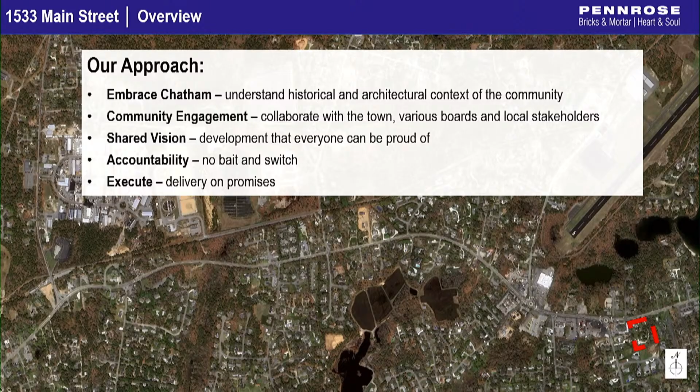Our specific approach on this project, post-RFP, was to listen to the community and stakeholders to further refine a plan that will be well received by the town of Chatham. Since being designated developer, we've engaged with multiple town departments, town staff, and different associations and boards to try to refine something the town of Chatham will be proud of. One thing we pride ourselves on is that we're very transparent, there's no bait and switch; the plans we're presenting tonight are what we fully intend to build. This slide shows an example of the stakeholder engagement we've undertaken, representing our collaborative approach, which we intend on maintaining going forward. This isn't the end of our engagement with stakeholders.

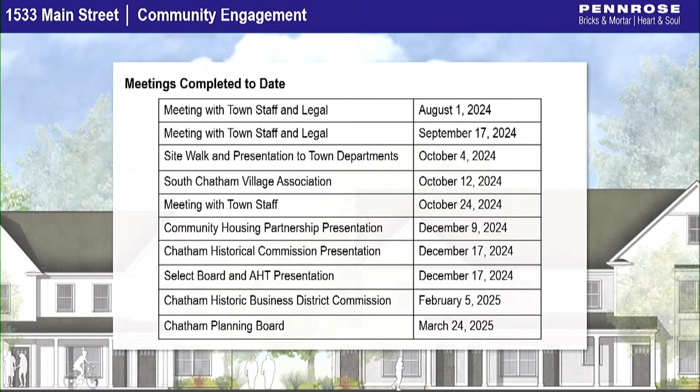Okay, at this point, I'd like to introduce Paul Atman from Union Studio, the architect, to present the design of the buildings.

Thank you, Rio. Hi, everyone. I'm Paul Atman. I'm a principal at Union Studio Architecture and Community Design. We've been in practice since 2000 with two offices. Primarily, our home office is in Providence, and we have a small 5-person firm in Philadelphia. We are a mission-oriented firm, and our mission is to use the power of design to enrich lives and improve communities wherever we work and live, bringing integrity and community with our clients to the projects they envision.

We have extensive experience here on Cape Cod, where we have a lot of projects, both small and large in this scale. We've done a lot of advocacy group work and research with the Cape Cod Commission to outline better strategies for Cape Cod's housing crisis, looking at where and how to develop smartly and with appropriate density for the communities on Cape Cod.

These are a couple examples of projects we've done and are realized. On the left is Park Holm in Newport. This design is a basis of what we're proposing tonight. It's a 2.5-story volume on the front end with a short tail of 2 stories off the back. The Park Holm image here is much longer than what we're proposing. Our proposal is actually truncating the building right about this line, so it's not as long.

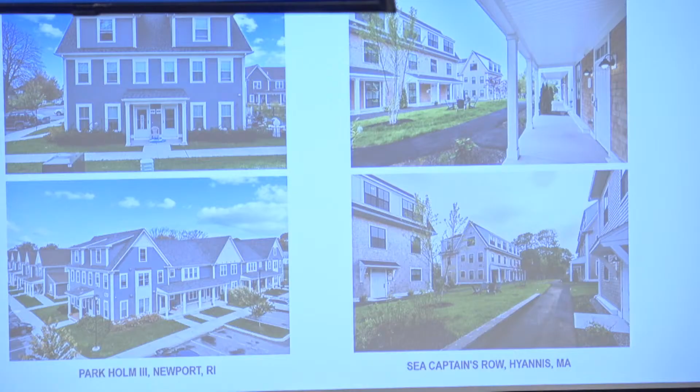A little closer to home is Sea Captain's Row in Hyannis, which is workforce housing—small scale, multiple buildings on a site near the ferry terminal, 2.5 stories with 1 to 2 bedroom units.

As Rio mentioned, we've been working with the town and meeting with stakeholders since August, and we've incorporated a lot of the feedback we've gotten along the way. We've added additional parking along the roadway, since there was concern there wasn't enough in our original proposal. We've located accessible parking spots appropriate to the accessible units—there's 14 of them in the neighborhood—along with a community building.

We've repositioned the 2.5-story buildings further away from adjacent residences. We've strategically taken the 2-story smaller townhouse buildings and put them along the property lines closer to the residences on the back, south, and west sides.

We've decreased the overall length of the community building that was fronting Main Street, since there was concern that facade was too long and was blocking views into the neighborhood. We've also increased the road width to accommodate vehicle access, primarily emergency vehicle access, from 22 feet to 24 feet.

We've identified all the existing trees mature enough to be saved and incorporated them into our design—Mark will talk more about that later. We've identified potential roof locations for solar panels throughout the neighborhood, and we've incorporated different siding materials, details, and window patterns on buildings to bring more variety where the same building might be used a couple times throughout the neighborhood.

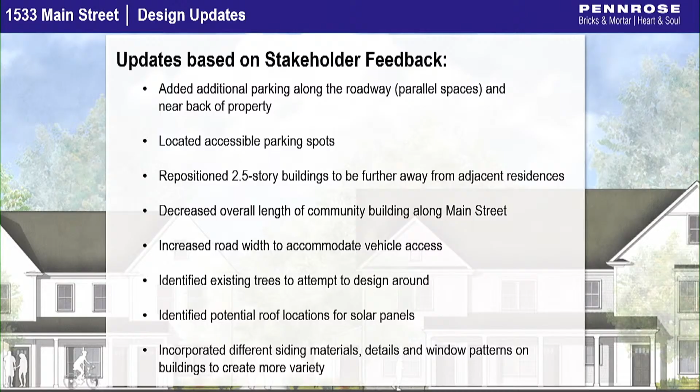We've looked at how we can differentiate the buildings to bring a little variety. I should point out we are not looking at color yet. We did get a lot of comments that white on white is not appropriate, so we understand that, but we didn't want to start the 'color by committee' exercise too soon.

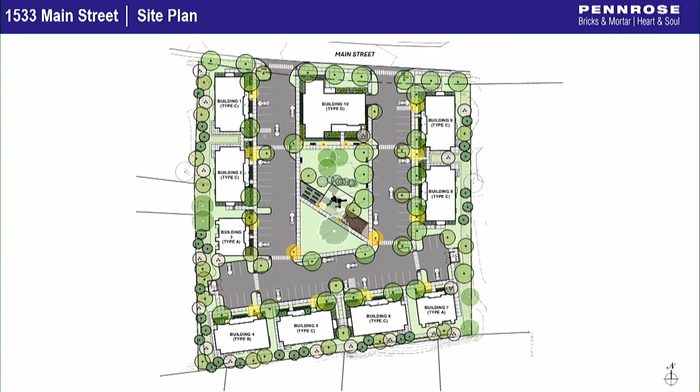I'd like to walk you through the proposed site plan. On the plan, north is Main Street, and we're proposing a very simple vehicular circulation in and out of the site, with ingress and egress at two curb cuts, two-way traffic around, organized around a common green where Mark will talk more about it, with a playground, passive recreation space, and existing trees being saved. The turnaround here is for emergency vehicle access, allowing a hammerhead turnaround so they can easily egress the site when they come in.

All of the buildings have multiple front doors, and each unit has its own front door to the exterior, which allows us to really activate the street and the network of sidewalks throughout the site. For instance, there are 2 front doors here facing Main Street, and the other 4 apartments have their own door along a common porch facing the sidewalk. We've been very careful to position those front doors to give a front for each building, and in some cases 2 fronts—one for Main Street, and one for the internal roadway of the neighborhood.

Mark will talk about the landscaping, and Joe will talk about the civil engineering a little bit more.

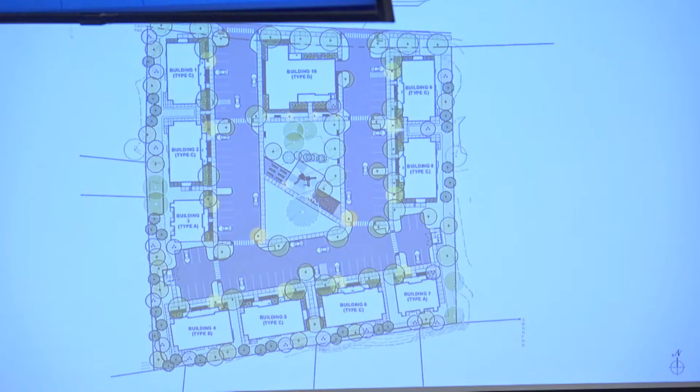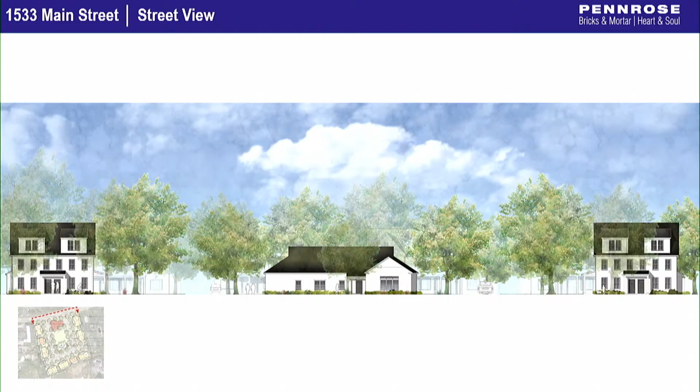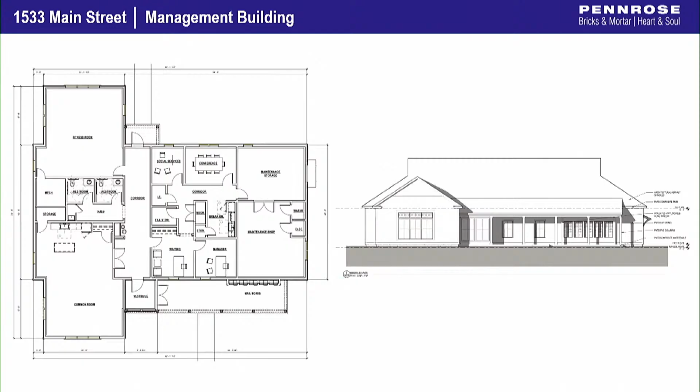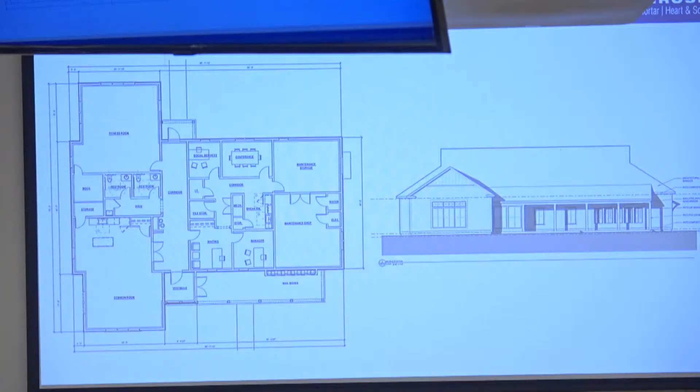The management building is what Pennrose proposes on developments of this size, and if there's questions about that, Rio can talk about it, but it's very simple. There's a common room here for the residents to use, a small fitness room, and they share bathrooms. The majority of it, about half, is management office, as well as a maintenance shop and maintenance storage. Pennrose manages all their properties, and if there's any questions regarding that, Rio could talk about that.

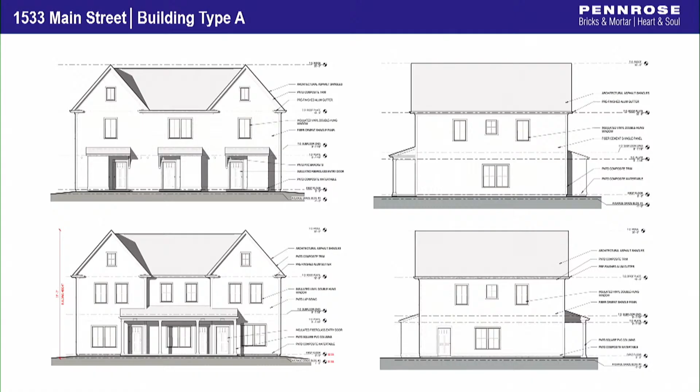This here is the smaller building type, the 3-unit townhouse. We are asking for a waiver in terms of building height. We know that the limit is 30 feet, and we're proposing building heights from 30 to 34.9. So we're just a little over, but they're 2-story buildings as the code, the ordinance anticipates, and also 2.5 at the very highest level. These are the 2-story buildings.

This here is a 6-unit with 2 units on the ground floor and 4 small 1-bedrooms on the second floor. This here is the larger one - it's still 6 units, but it's 2.5 stories on one end of the building, and 2 stories on, let's say, the tail end.

The proposed materials are asphalt shingle roofs, vinyl windows that are super insulated for energy efficiency and Energy Star certification. There's lap siding on the front part of this building and then shingle on the back side. We've arranged and proposed different window fenestrations, so in some places where there's a double window, that same building down the road might be split to a pair separated. There's little nuanced differences that we're working into the design.

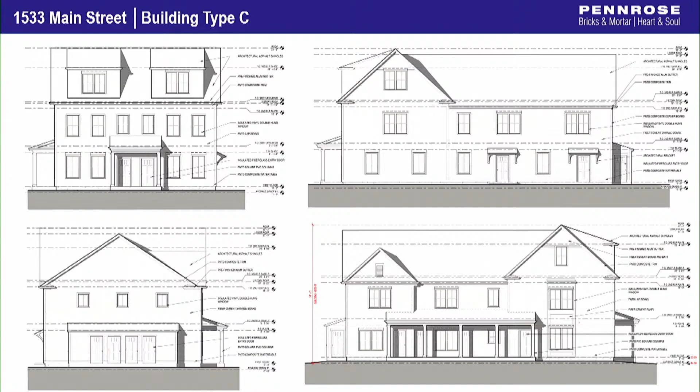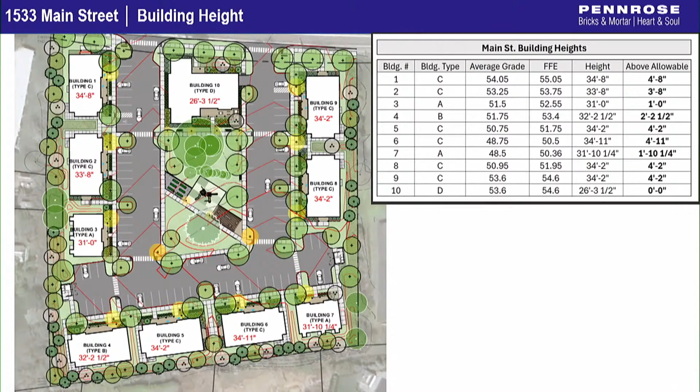I'd like to turn it over to Mark from Crowley Cottrell next. Thank you, Paul.

So looking back at the site plan, we have provided sidewalks around the entire community so that it's walkable, as well as some locations for bike storage and lush planting for the streetscape. There are street trees proposed along the internal street as well as Main Street.

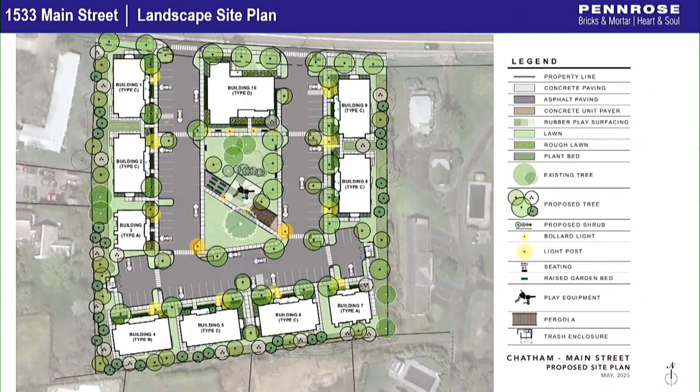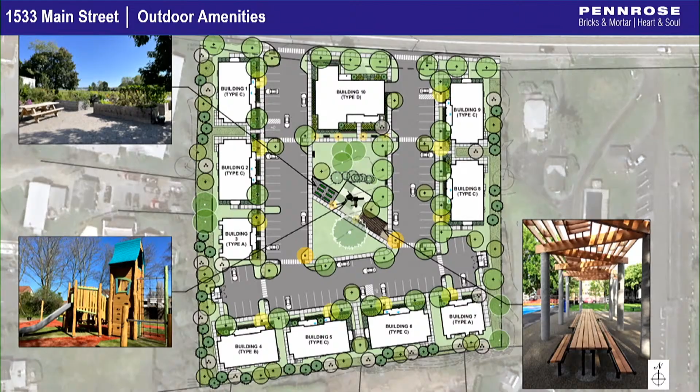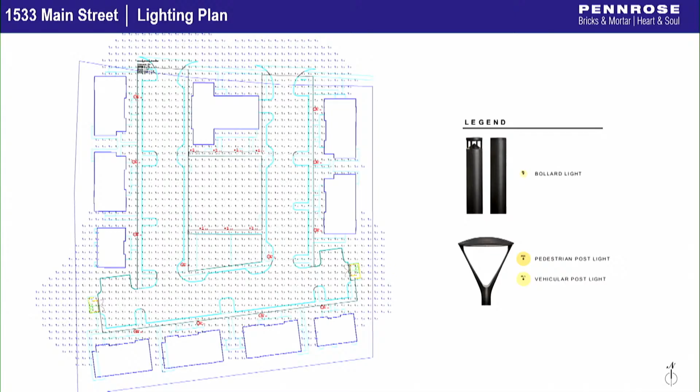This plan here, which looks like just a lot of numbers, is a technical plan that's calculating the amount of light that's being produced by these fixtures. The important thing to note is that we are at the lot lines, we're at 0. So we're not throwing any light over to abutting properties and keeping the light where it's needed in the areas where people will be traversing.

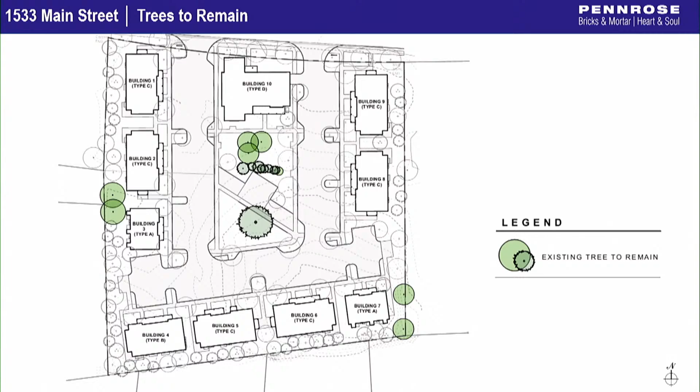We've worked really hard to preserve as many mature trees as possible. There are a few on the periphery to the west and in the southeast corner, and the majority are in this community green area. We've been able to preserve a statement evergreen tree as well as some big maples, and a remnant hedgerow that we'll keep and prune for sightlines. This goes a long way in helping the community feel these trees fit in and are beautiful, and they'd be really hard to install at this size, so we're glad to keep these.

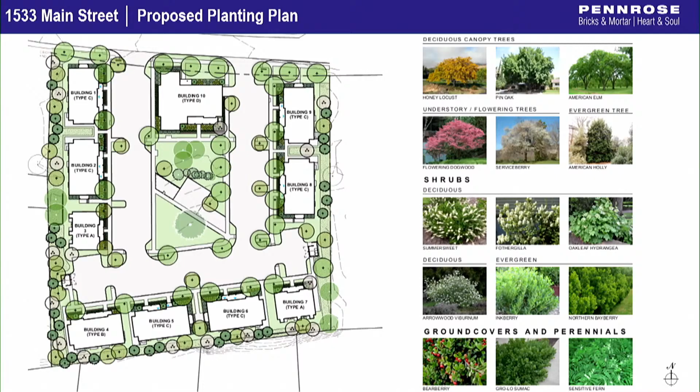This shows our planting strategy. As mentioned before, there are street trees along all the roadways, but we're also proposing a substantial buffer planting on the edges of the property, as well as lush streetscape planting of shrubs and perennials. These pictures are just some examples of what that could be. We're going to keep everything suited to the Cape and for interest throughout the year.

I'll hand it over to Joe.

Hello, good afternoon. Joe Henderson with Horsley Witten Group. We're an environmental consultant firm out of Sandwich, and I'm going to walk through some of the site grading and utility components of this project. Here you'll see this is the site plan. Paul touched on it earlier a little bit.

There are two entrances off of Main Street. As part of our due diligence for the project, we coordinate with the fire department, so we've run a program showing that a ladder truck can circulate the site, and that's been completed. As for dimensional requirements, Andrew will touch on some of the waivers a little later, but we do meet the side and rear setback requirements. However, for the front, we do ask for a waiver.

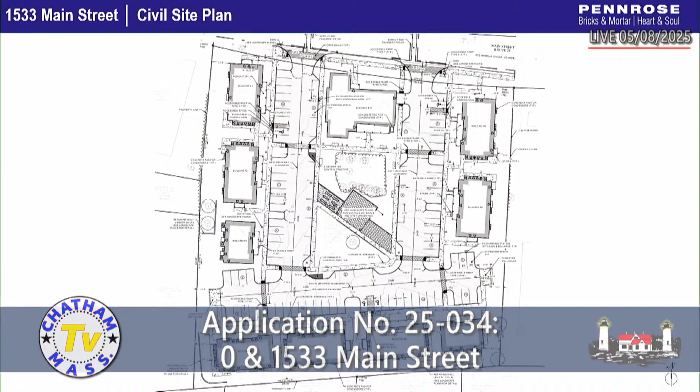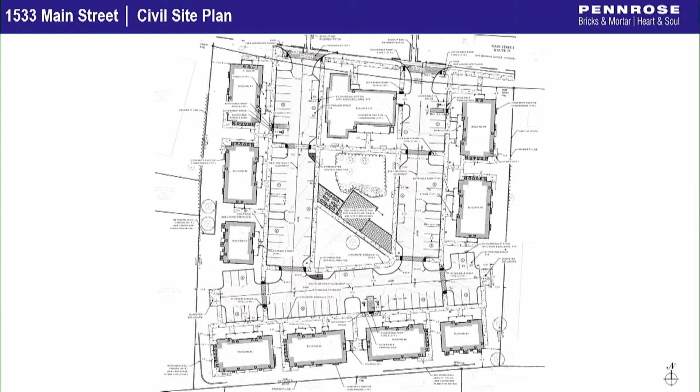All the parking is either 90-degree or parallel. The 90-degree spaces are 9 by 18 feet, and the parallel spots are 8 by 22 feet. Road widths are all 24 foot or wider, as Paul mentioned earlier. We are locating two dumpsters on the site, one on the east and one on the western portion.

I'm going to switch now to the grading. As for our approach, the site does slope from Main Street to the south, so we've done our best to match that as much as possible with our proposed grading. We use a GSI or LID type method for our stormwater management, incorporating tree trenches where we treat the water quality volume, typically about 1 inch of rainfall. Larger storm events will go into underground chamber systems located throughout the site. We are proposing to meet the stormwater management policy, and we've submitted as part of the application our stormwater management approach outlining all the calculations and everything that goes along with that.

As for site utilities, there is sewer available in the street, with 3 sewer stubs along Main Street, one of which is for the existing home. We're proposing a combination of gravity and a pump station: a portion of the site will flow by gravity out to the street, and another portion in the lower area will require a lift station that pumps to the gravity system and out to the street. The lift station would have redundancy in its pumps, and there would also be backup power available in case of emergencies.

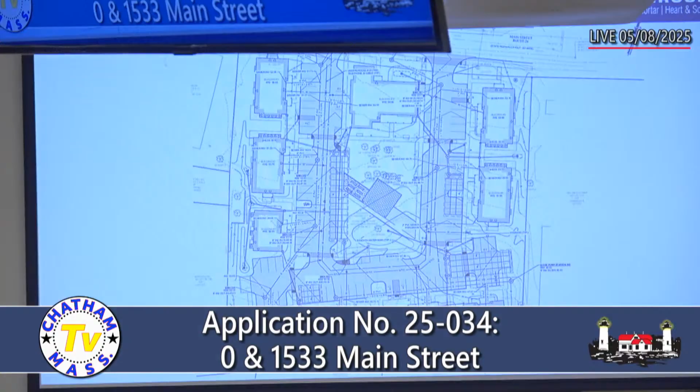The slope along the back rises slightly to the abutters, and on the west side we are slightly lower, while we match grades around the east side predominantly. That's all I was going to touch on, and I'll turn it over now to Andrew.

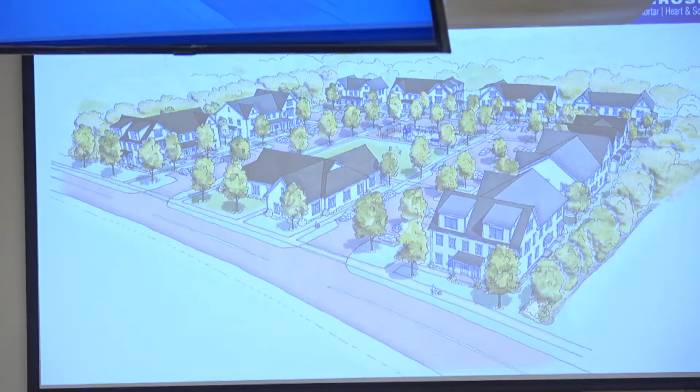Good afternoon. For the record, my name is Andrew Singer, attorney assisting the project. I had submitted a legal memo to the board, and I won't go through all of it because what we hope to do today is, after our presentation, give time for initial comments and questions from the board and the public before we're continued, since we're introducing things today. There'll be a lot of questions and details we may not hit today, but we're happy to provide answers or discuss them whenever.

And we have your memorandum, thank you.

So this, as the chair had mentioned at the beginning, is a project under Chapter 40B, Sections 20 through 23. So it's different from a 40A project, which is what you usually look at. This comprehensive permit will be providing affordable housing.

In this case, 25% of the apartments, 12 of them, are going to be deed restricted at 80% of the area median income, which is what's required for a comprehensive permit. However, in addition, in the land disposition agreement that the applicant has entered with the town, they have agreed to ultimately enter into an additional affordable housing restriction with the Executive Office of Housing and Livable Communities.

That would restrict 32 of the 48 apartments at 60% of area median income and 16 of them at 110% of area median income. So anything over 80% restriction is considered workforce housing, and anything under 80% is considered low and moderate income, deed restricted. It's all deed restricted, but at a lower affordability level. The 60% AMI level will provide an even deeper level of affordability, and it all gets into what incomes a family, whether an individual or family with or without children, can earn to qualify for these units.

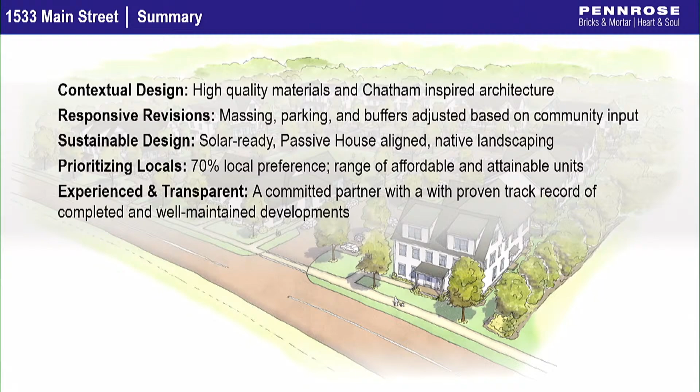And lastly, Pennrose has a strong track record of delivering these types of developments. We invite you to see some of our other projects in the area. We're proud of the projects we've built here, and we think there's a through line through all the projects we've done in New England of being high quality and well-maintained. That's it. Thank you, Chair.

Yeah, thank you so much. So I will announce that we have asked all required commissions and boards to provide us with comment, and we don't have them quite yet, and we didn't expect to. We'd like to have those by the June 5th meeting, and that would require them being filed by June 1st. We'll read those at that point in time, whatever we receive.

Okay, so the next thing we're going to do is take comments from those who are in the audience, and you can go to the microphone in the middle versus up there. And you gentlemen can sit down because this is not going to be a back and forth. So people can either go to the podium for up to 3 minutes and the clock will be on, or you can go to the middle. Who's raising their hand? I see that gentleman right there first, and then we'll go to Attorney Riley after that.

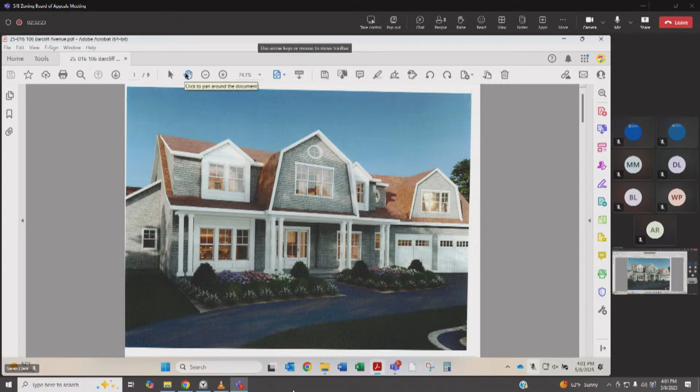What a handsome building. So what we've done since we were last here - there was concerns with the size of the building, even though we have 42,000 square feet. But the applicant, Jill Boudreau, who's here today, also worked hard with her designer, and they've reduced the gross floor area by 1,200 square feet. We've reduced the building coverage from 8.7% to 8.4%.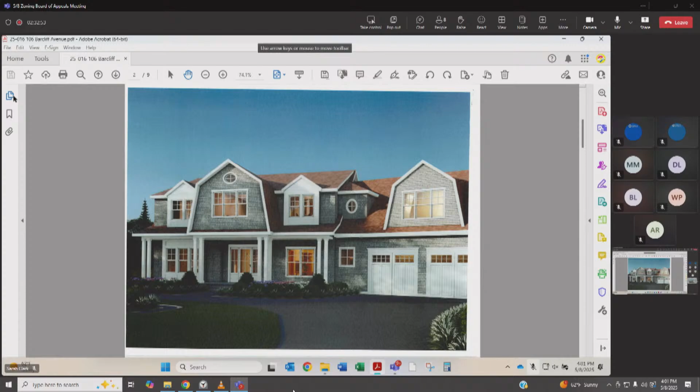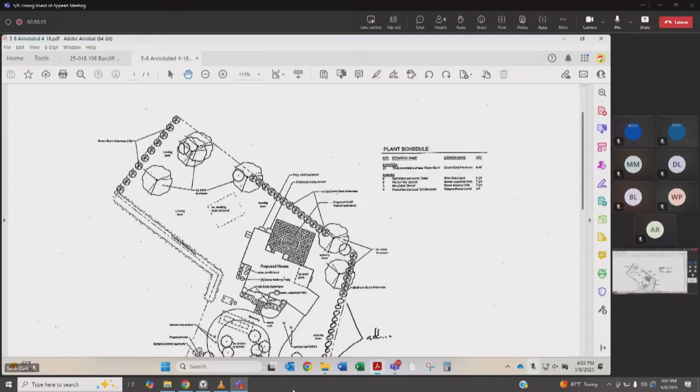We've increased the sideline setback on the west side, 25 feet to 29 feet. We've had conversations with our neighbor to the east, who was represented by Mr. Litchfield, and we've reached an agreement where we've agreed that we'll plant a total of 16 arborvitae. That's the sketch plan that Bill sent over. So we're proposing 6 arborvitae along the property line. They've asked for a total of 16, and we've agreed to that, and we're happy to have it be a condition of the approval if you think that's appropriate.

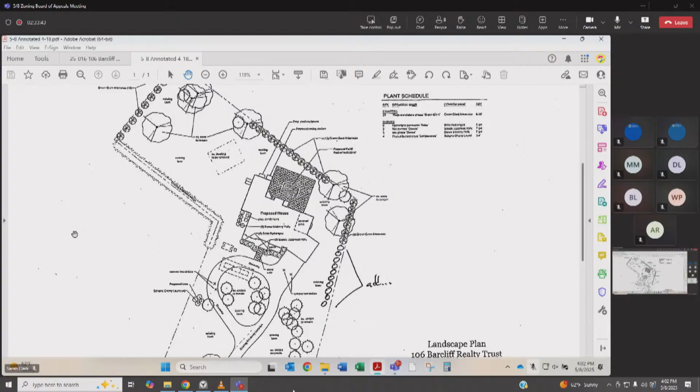I know that Bill has submitted a statement that with this condition, his client has no objection to the proposal. I'll be happy to run through the criteria briefly. We don't need you to, but thank you, because you submitted written copies, and we're good.

At this point, is there anybody here or on Microsoft Teams that wishes to speak in favor of this application? If so, please make it known. Attorney Litchfield is on Teams. Welcome. Thank you, Madam Chairman.

I've never appeared before you in this matter, but I had a couple of other things to do today, unfortunately, and I recognize you've had a long day. But as Mr. Riley said, the applicant has been very helpful and cooperative and has agreed to plant and maintain those trees. So if the board will include a condition that the 16 arborvitae be planted and maintained along the boundary line approximately as shown on that plan, my clients have no objection, and we thank you.

Thank you. Anybody else wish to speak in favor? Seeing none, I'll read the correspondences.

We have a note from Judith Giorgio from 5/6/2025. She reviewed the plan for the property. It's large enough to support a 4-bedroom dwelling in accordance with the Board of Health nitrogen loading regulation. The attic storage space will not be allowed to be finished because it has sufficient privacy to be considered a bedroom. A 5th bedroom would require the installation of an IA nitrogen-reducing septic system.

The permit for a conventional system for a 4-bedroom dwelling has been submitted to the Health Department for our review.

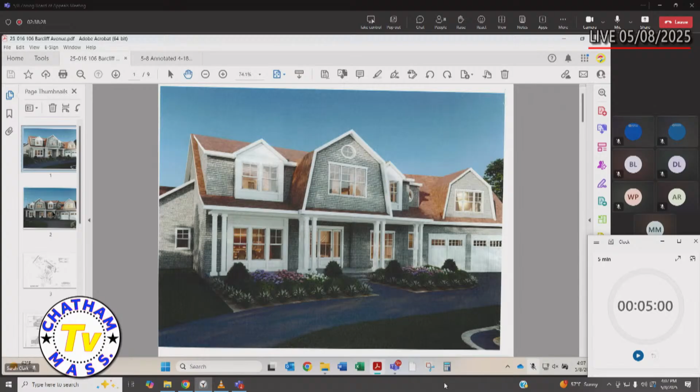There's two what? That's the same picture. No. Oh, okay, it just looks so different. Well, those are the pictures I submitted with the application. Okay, Sarah put them online. Or did I put them online? So, they're the same, just two pictures at different angles, slightly different. Okay, thank you.

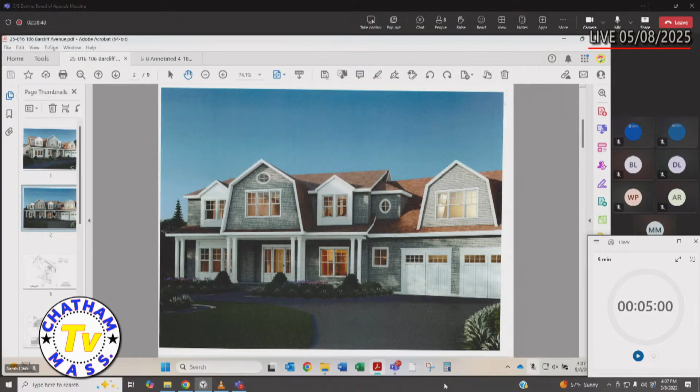The reason I asked about the picture is because that did look shorter, smaller. Now, you did say that you've made changes of, I think, over 1,000 square feet, 1,189 square feet. Can you be more specific about what changed? Because I didn't have the before and after rendering, so I couldn't really see what changed. I know building coverage only changed a little bit, and the reason I'm asking is because we spent an hour at our hearing in December, and we were very specific about criteria 2. I just don't know what's changed from a visual perspective, so I must be missing something.

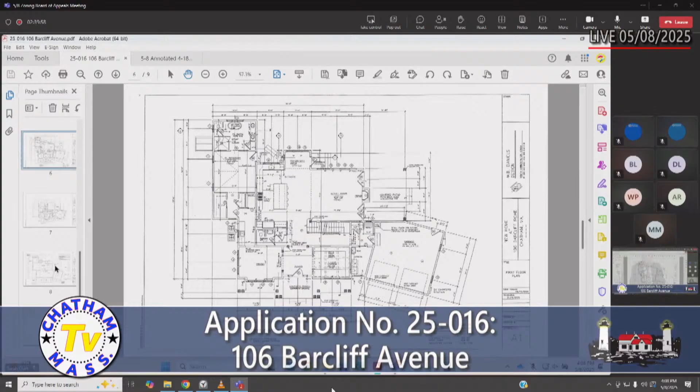Well, when you say what changed, as I indicated, the sideline setback to the east has not changed. Okay. The sideline setback on the west side is now 29 feet instead of 25 feet, so the building is at least 4 feet shorter than the previous building. I didn't measure the whole building, but now one corner that was formerly 25 is now 27, and another corner that was 25 is now 29. So the whole building is smaller. That's how, and of course it's all 3 levels, basement and the first 2 levels. That's where it doesn't take much of a change to get down to 1,200 square feet, more or less.

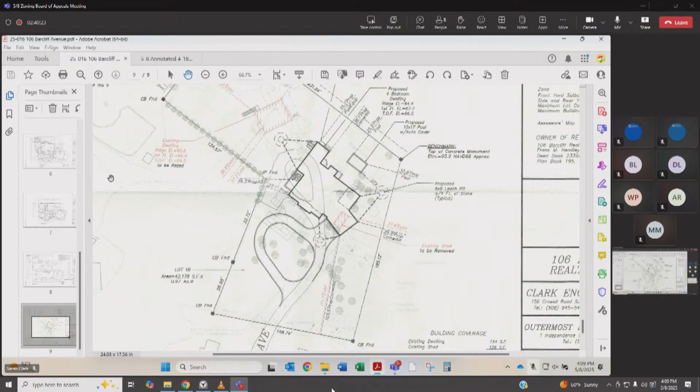One more question. I noticed that the attic over the garage has changed from what was before a game room, and now it's called an attic. Is an attic still counted in gross floor area? I believe if it's got ceiling height, it would be counted. As far as I know, we included the number in our application. Okay, that's what I wanted to know. Okay, thank you.

Questions, Steve? No, Bill's already attempted to answer the question I was going to ask. All right, Lee, any differences?

I just wanted to point out that on the prior plans, the house was in a different location. Right, they've shifted the whole footprint of the house. Well, except that the easterly sideline setback has remained 25 feet. Yes, exactly, the westerly side - but they've shifted it forward, so that's fine. But I've also noticed there was a decrease by 2 feet of the primary bedroom. Right, that might account for some of the differences in square footage in the gross floor area.

Paul, questions? Let me just come back to that space over the garage then. We've gone from calling that a game room to attic storage. Is there any other change in that room?

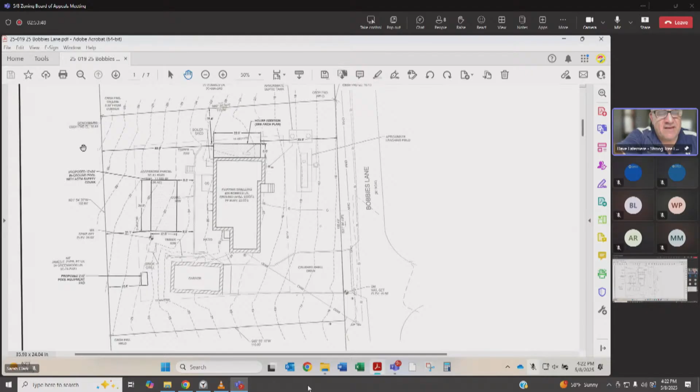We're inside the setbacks and we're still under the coverage. It pretty much goes along with what's in that neighborhood. I personally was out there a couple times. But that's why we're talking to you. Our plan, there you go, you have it on the screen. It fits in there pretty well. And if anybody's been out there, that's a lawn there. There's nothing really covering it to the street or to the side. So any questions you all have?

So we just have to run through the applicable criteria. Do you believe the size of the site is adequate for this project? Yes, ma'am. And it's compatible with neighboring properties? Yes, ma'am. And you don't have any increase in any nonconformities? The site is suitable, yes? Yes, ma'am.

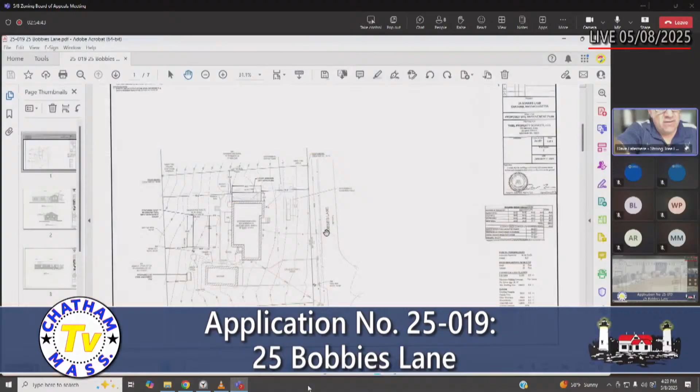What about the impact of scale, siting, and mass on neighborhood visual character, including views, vistas, and streetscapes? You feel you meet that criteria? Yes, ma'am, and mostly because on that side of the property there are trees, and if you look on our survey, the contours go up - it's a fairly good gradient uphill from that - so it really kind of protects it from being seen by the people in the back, and then of course it's just the street on the front there.

Okay, so closer to the neighbors, closer to the road, and this is about putting a bathroom in. Is that accurate? Yes, yes, ma'am. Okay, so is there anybody here on Microsoft Teams that wishes to speak in favor of this application? If so, please make that known.

Seeing none, we have one note from our health agent, received on May 6, 2025, and she has no concerns about this application. Is there anybody here on Microsoft Teams that wishes to speak against this application or has a specific question? If so, please raise your hand. Seeing none, questions from the board?

Are there any? No. Okay, Paul? I have no questions. I'll move to close the hearing and move into deliberations. Dave Veach seconds and votes yes. I vote yes. All vote yes. Ginny votes yes, as do I. So, deliberations. Ginny? Great project.

I think the addition on the side makes complete sense. I love the pool - I know they're not here for the pool, but I would support it. Very good. And Steve? Yeah, same thing, I think this is pretty harmless and not detrimental to anybody. And Lee? I agree with my colleagues, it meets our criteria, and it's a great project. And Mr. Nixon? I agree, this is not in any way substantially more detrimental to the neighborhood.

Mr. Acton? Yes, it meets our special permit criteria, and I would be voting yes. Mr. Veach? I agree with all previous. We'll go back to Paul for his opinion and then the motion. I agree with my colleagues, I will also vote in the affirmative.

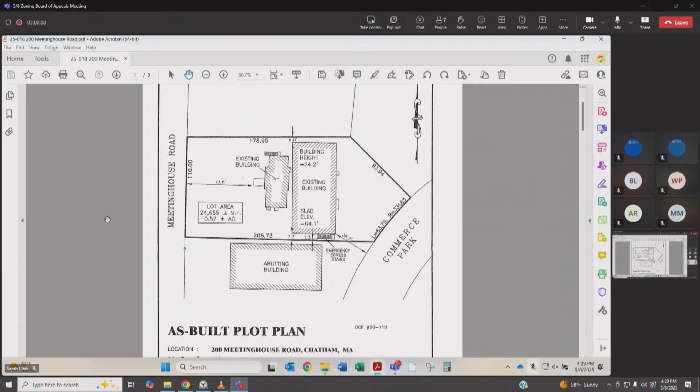They're required by the planning board and site plan approval. So they located the stairs on the side within the setback. And what our courts have found is that, without necessarily regard to the lot itself, if there are safety considerations, that qualifies as a hardship.

The most recent case was decided in the appeals court, and it had to do with a shipyard, boatyard up in Salem, Mass. It was a large area with a large open space, and there was an old Quonset hut where they used to do their marine repair, located more or less in the middle of the lot.

They wanted to remove that building and have a more modern building where they could do more work on larger boats. They proposed to put the building within the sideline setback of the lot, even though the open space was over 150 feet wide, and provided parking and other space.

The justification for the grant of the variance was that the boatyard used a thing called a travel lift. I don't know how familiar you are with boatyards - a travel lift is generally a large mechanical device they use to pick up boats and move them around. It's a rectangle frame with a couple of straps, and they can pick up large boats and move them.

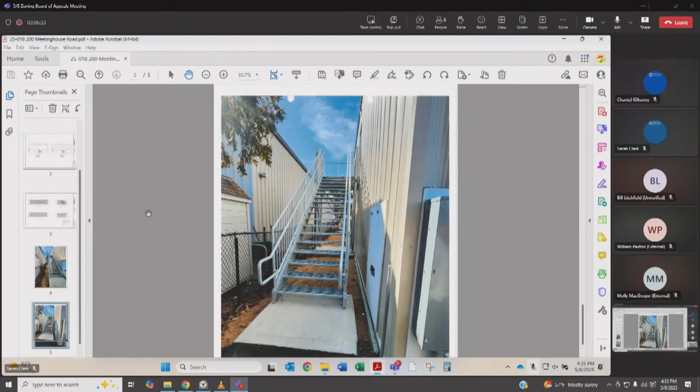Thank you. Is there anybody here on Microsoft Teams that wishes to speak in favor of this application? Seeing none, I will read the correspondence.

There are two. First, we have a note from our health agent, and she tells us on May 6, 2025 that this application will be heard at the May 8th... oh no, I'm sorry, I'm reading the wrong part. I have no concerns regarding the setback variance.

Robert Stello tells us in his own handwriting, so we'll see if I can read it. May 6, 2025: he wants to express his favorable agreement for allowing the stairway located at 200 Meeting House to remain in its present location. Being a builder, I feel just for safety reasons it's important to have egress options. I realize we have zoning regulations and the stairway's encroaching on these requirements. I, as the most affected by being the adjacent abutter, feel the structure serves a purpose and does not harm our property. The structure is well-built and adds to the overall look of the new building. The staircase is basically there for emergency use. I support this appeal as a builder. Sincerely, Robert Stello.

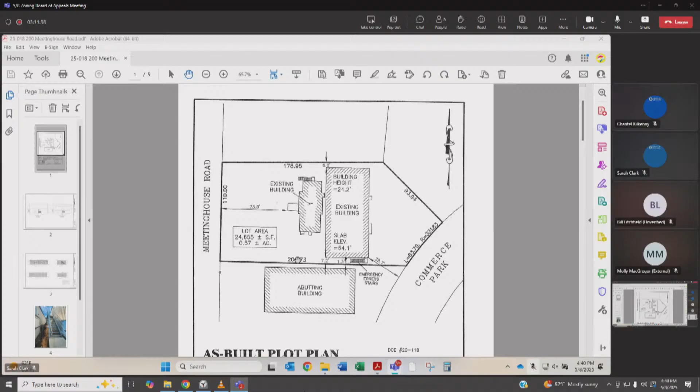On the Meeting House Road side? If you look at the site plan, there's a handicap spot right where you're suggesting it would go. Well, there's plenty of room to create parking on the Meeting House side, right? Yeah, okay.

So anyhow, I haven't looked at these cases. I assume what you're saying is correct, and I have no reason to doubt it. And I guess that's an exception that you would provide for a dimensional variance. So I guess it answers my questions.

Okay, Lee, questions? Would it be possible to create a new door on the back side of the building and put the stairs on the back side? Well, we run into the parking spaces that are required by the planning board.

This is the plan that went to the building department for the building permit that shows the parking spaces at the Commerce Park side for the unit, as well as the parking spaces for the building on the Meeting House Road side. Okay.

Is that answered? Okay, Steve, questions? I think my question was probably answered by Jay. I was going to ask if this stairway was built as part of the original building permit with the building, or if this was some sort of an afterthought that had to be permitted on its own. And it kind of sounds like the latter.

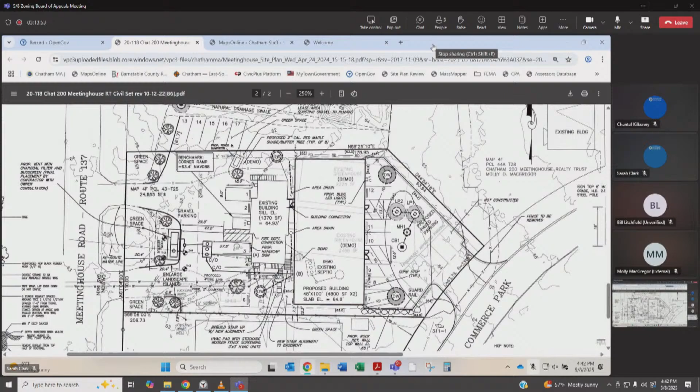So a question is, when you say they're requiring this parking, are they literally requiring there to be spaces? I didn't go through the criteria, but the zoning bylaw has a requirement for parking spaces based on the square feet of the building, and I assume those are the spaces that were required.

So if stairs had not been an afterthought and had been put on the side where that, like number 7 is, the planning board may have approved it still. Just, so they maybe could still go in the front, I guess, is my question for you.

Okay, thank you. So, I just want to clarify, and I'm not accusing you or anything, but I didn't notice that you gave us any argument whatsoever as to number 1 in the variance requirements, owing to circumstances relating to soil conditions, shape, or topography of the land or structures, especially affecting such land or structures, but not affecting generally the zoning district. I just want to clarify, we didn't hear anything, did we? Did I miss it?

That's correct, because the cases that I cited, particularly the Furlong case, which is a 2016 case, the court found that there was a hardship based on safety without any regard to those criteria - soil, shape and topography, without any regard to any of them.

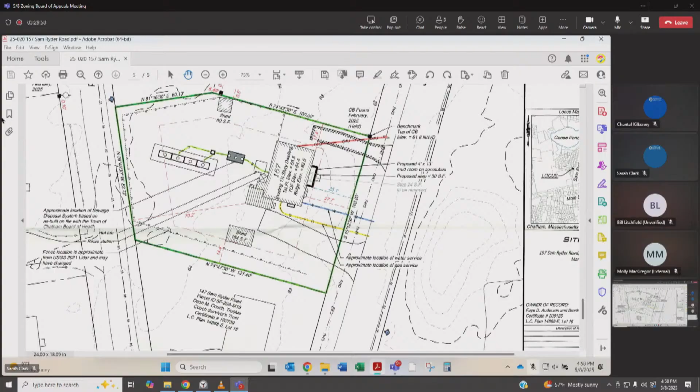We are doing a small mudroom, and it is a mere 0.4% that we are adding, a whole 53 square feet to make this tiny little mudroom. It's officially 4 by 13, and it's sandwiched in between the house and the front setback line, but staying within the parameters of not needing a variance. We are not going to impact our neighbors in any way. You basically won't even notice this happened, because we have way too large Leyland cypress trees in front of our house that block seeing the front of our house anyway. But it also can't really be seen from any of the neighbors, and it's very small. It's not going to make our house look much bigger at all, because again you'll barely notice it. And we'll easily fill it up and wish we made it bigger.

What was the other one you wanted me to speak about? We're not going to impact the environment. There's a little bit of plantings there right now that I'm just going to relocate in the back of our yard. I'm not taking out any trees, just moving them around. I think you did a great job.

Thank you. Plus, again, we have the written findings, so we'll let you off the hook. Is there anybody here on Microsoft Teams that wishes to speak in favor of this application? If so, please make it known. Seeing none, I will read the correspondences.

We have a note from the health agent, as usual, and then someone named Falwell. The health agent has no concerns, and she told us that on May 6th. Mary Falwell owns the property at 38 West Pond in Chatham, which abuts 157. They say you've improved the property tremendously and have no objection to the proposed addition. They're in full support of your application.

Is there anybody here on Microsoft Teams that wishes to speak against this application or has a specific question? Are there any questions from the board? No. I'll move to close the hearing and move into deliberations.

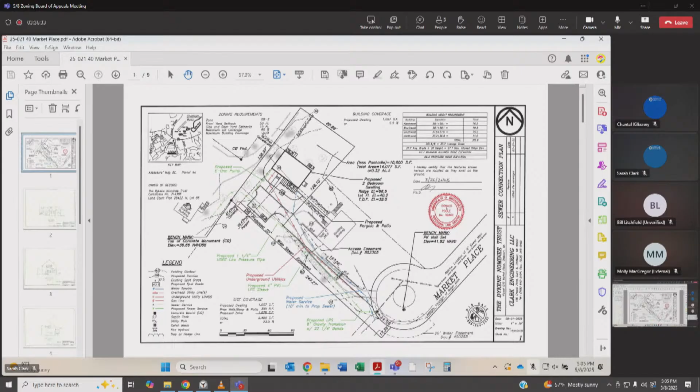Moving along to the criteria, it's a little different because it's under Section 8 of your zoning bylaw. Number one is adequacy of the site in terms of size of the proposed use. I'd suggest the site is adequate. The house meets all dimensional setbacks. The total building coverage for the house is 9.9%.

That would be well below what's allowed if this was in an R20 zone, for example, which would be up to 15%. So it's even smaller than what you'd see on a lot of residential zoning districts. There is also sufficient area on the site for adequate parking, as you see on the site plan prepared by David Clarke, for use as a single-family dwelling.

Number two, suitability of the site for the proposed use. Again, we believe the use of this site as a single-family home is adequate, and we think it's probably the best use for this property as opposed to some sort of commercial use. Its lack of visibility from the street, narrow access from a panhandle off the Marketplace cul-de-sac, and limitations on site for adequate parking for commercial use really lend itself to the best use as a single-family home.

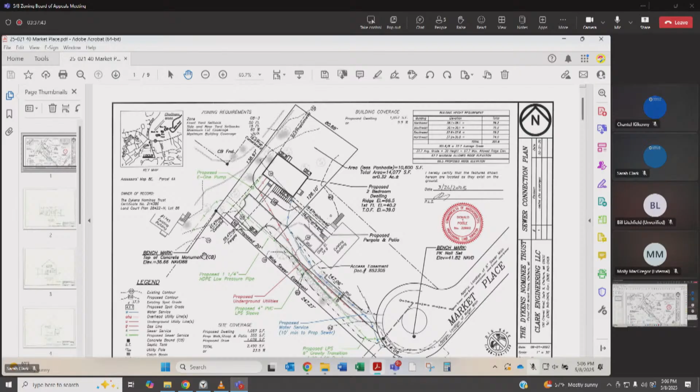Number three, impact on traffic flow and safety. Because this will be a house, there's no negative impact on traffic flow and safety. Four, impact on neighborhood visual character. Again, we believe there'll be no negative impact on neighborhood visual character. The proposed house is modest in size and located in an area where it's not highly visible from the street or from many neighboring properties.

I did provide a gross floor area analysis. I did not include any of the commercial structures because that's really an apples to oranges comparison. But in terms of the residential structure, the numbers are certainly compatible and appropriate. One subdivision that abuts is Rumson Way, and if you look at the homes there, it's very much in line with the size of the structures on that particular subdivision.

Number five, adequacy of methods of sewage disposal, source of water and drainage. The house will be connected to town water and town sewer and will have adequate drainage. It will have all necessary utilities, and because of its use as a single-family home, I don't think there are any specific public services required for the property. Noise and litter, again, single-family home, so no issues or concerns relative to noise and litter.

Compatibility of the proposed use with surrounding land uses. Again, while it's in a general business zone, the neighborhood really is a mixture of both residential and commercial uses, so we think it's certainly appropriate and compatible. Impact on the natural environment - no negative impact on the natural environment, and it's not a formula business, so that's not applicable. So again, we think it's a reasonable proposal.